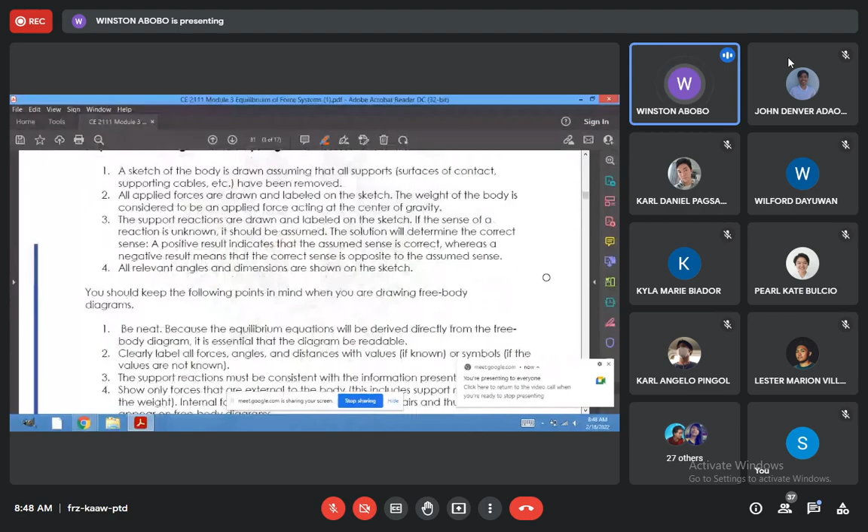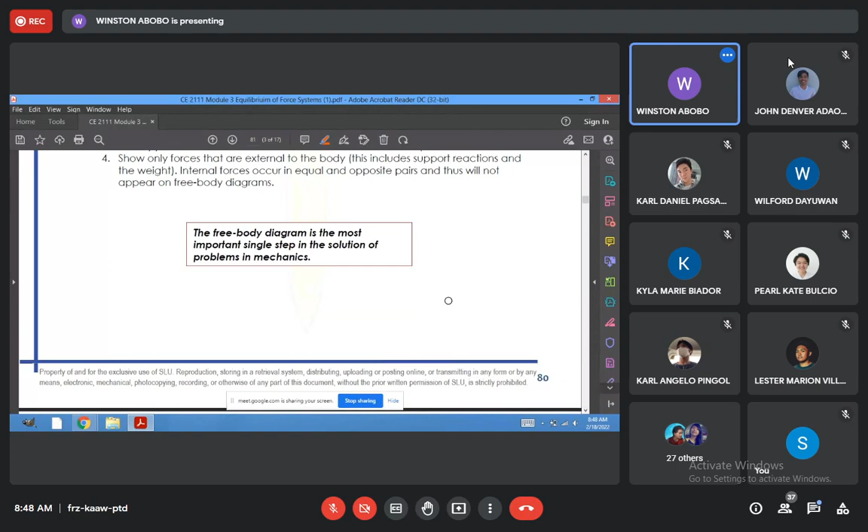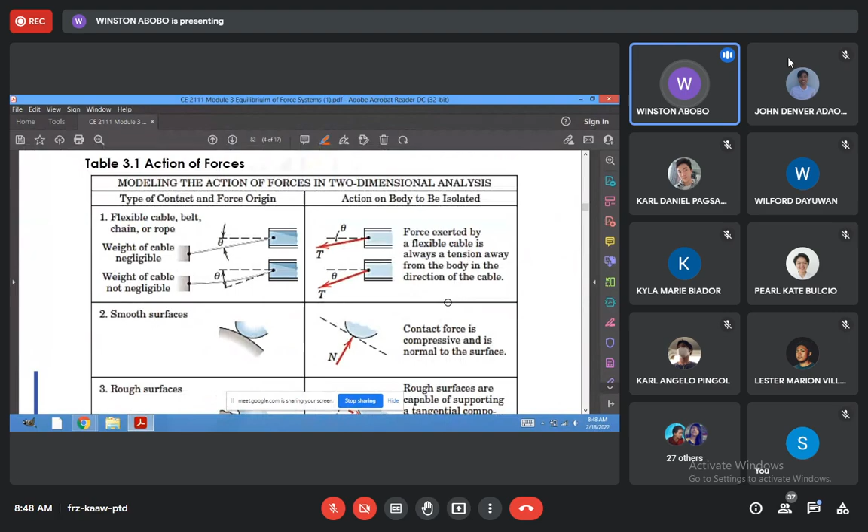The free body diagram is the most important single step in the solution of problems. I will also have to second it, that it is the most important. So therefore, if it is part of the solution, then it should be part of your requirement before you can start.

Then we went on to the different terms that we were talking about: cable, surface. For the sake of our discussion, since we have not yet discussed friction, all the surfaces are assumed to be smooth.

So don't ask whether it is smooth or rough. As I've said, as long as we have not yet discussed the topics on friction, all surfaces are considered to be smooth.

So you have a single reaction that is normal to the plane of contact between the support and the surface. Then you have here the most commonly used, the roller support. The roller is single, normal. The terms used are roller, rocker—this is the rocker. Sometimes roller is used as long as it has wheels. Again, this is a single reaction.

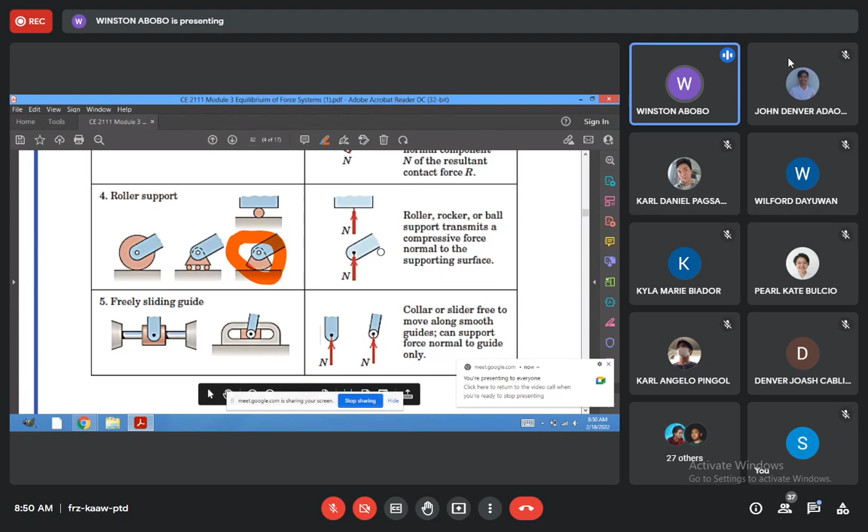So these are the things that we have to see, terms that you would usually meet along the way: rocker, roller. The symbols are there. And of course, as we said, the representation for the reaction is a single force.

And then, of course, sliding is almost the same like a roller. And then you have the pin connection. As I've said, the other word I use is a hinge because of its action, which is also the same like a hinge.

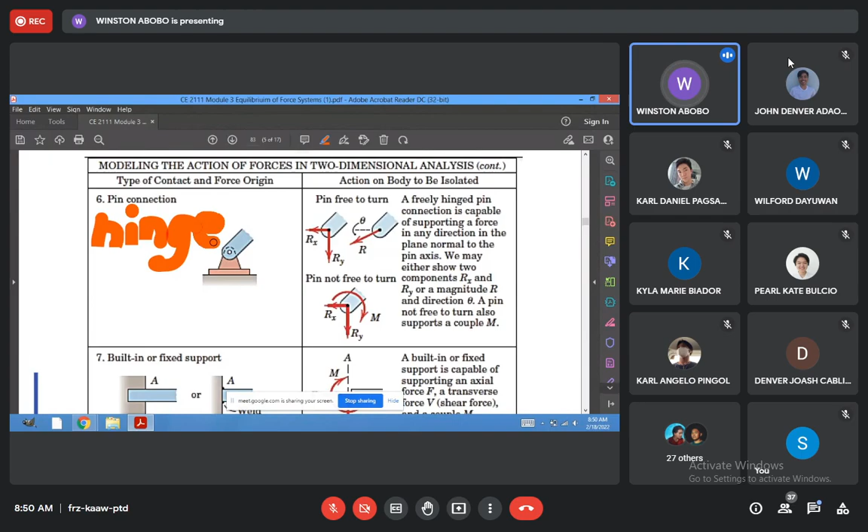So you have two cases. You have a pin free to turn, and this is the assumption that we will have first and foremost here in statics. Pin free to turn means it has no resistance for moment. This is different from steel, where you have moment resisting pins, because your pins are basically somewhat anchored to the component. But take note, what we will be having along the way is pin free to turn.

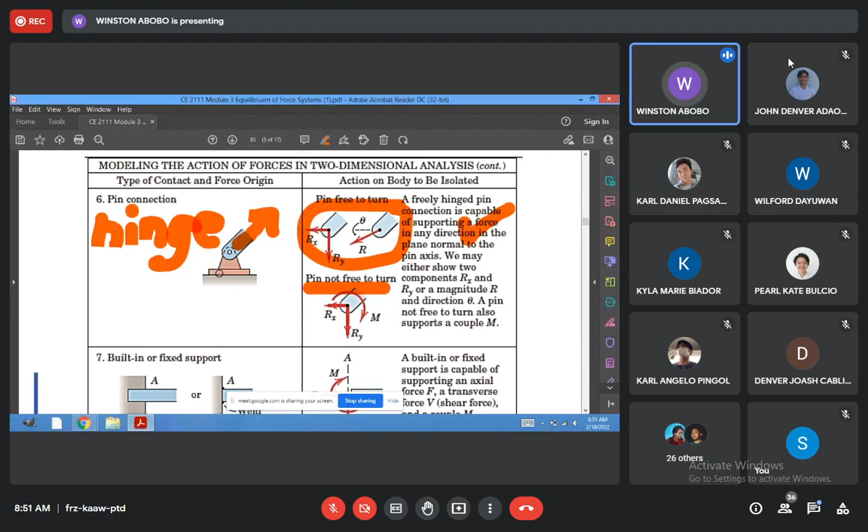So that is now our assumption. And of course, there are two reactions, horizontal and vertical. So these are the things it can only do. If the action on your element is upward, then the direction of your horizontal would be to counteract actor and reactor. This would be the components of your reaction on the hinge, towards the left and downward. That is the correct one.

Because if it is compression, then of course you have to analyze it. Since these are components, horizontal and vertical, you should compute for the total reaction, which is the square root of horizontal squared plus vertical squared, and get the angle theta. So I repeat, for the sake of this discussion onwards until the finals, all your hinges or pin connections are considered to be pin freely rotating.

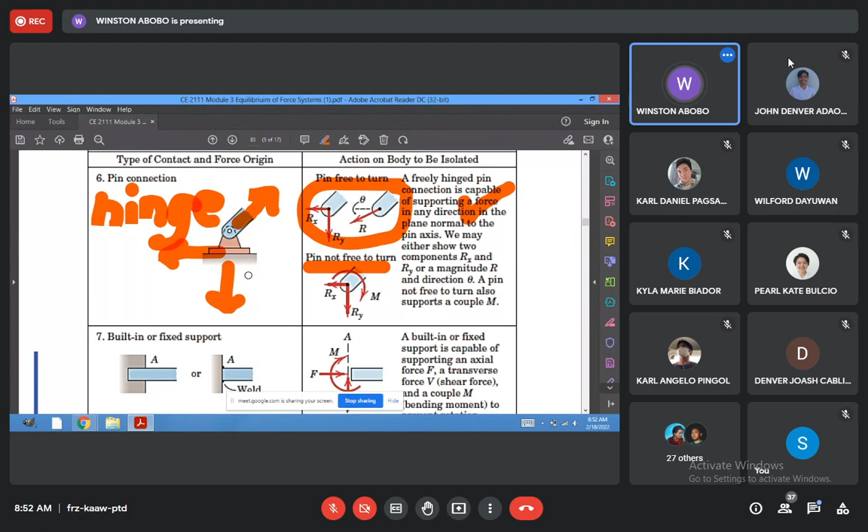The other type which you would be observing, utilized especially in strength of materials and also in this case, is a built-in or fixed support. If it's fixed, you can have the illustration like a structural steel which is bolted or welded to an anchorage on the wall. So this is the same scenario, and you'll notice it has three reactors: vertical, horizontal, and a moment.

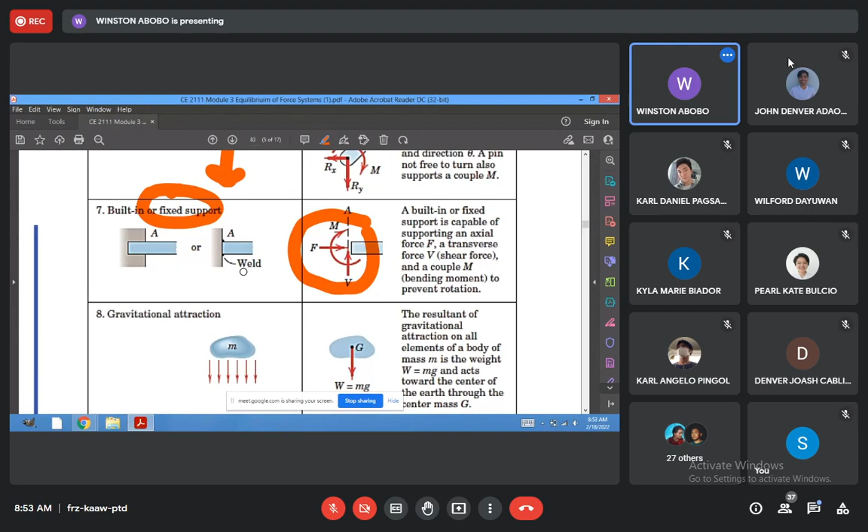So your fixed or built-in support has three: horizontal resistance, vertical resistance, and moment resistance. So if they are reactors, then obviously you can have that.

Determinate—there are terms like the determinate process. What does determinate mean? It means it is statically determinate, meaning you can use your three equations of static equilibrium to solve for the unknown.

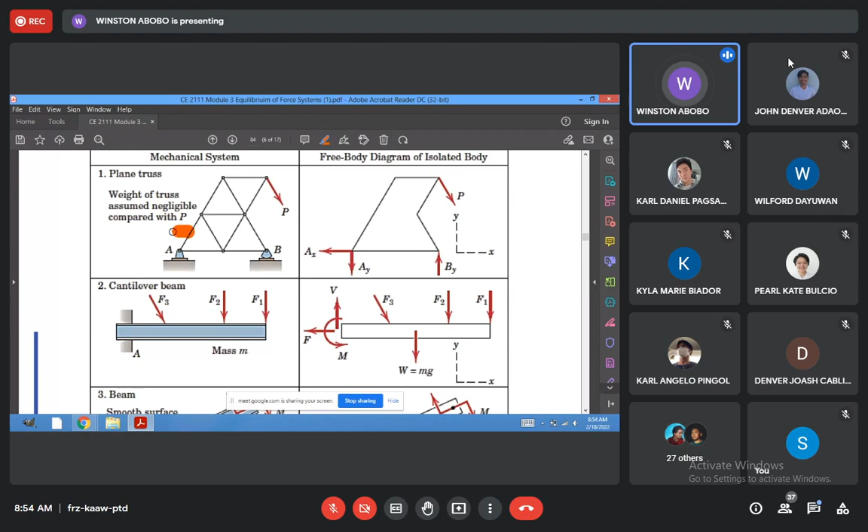In this case, the support conditions are a pin or hinge and a rocker at B. If you count the number of reactions: 2 for the pin or hinge and 1 for the rocker, that's 3 unknowns with 3 working equations, so we can say this is a determinate truss. But aside from that, we will soon learn from analysis of structure that the number of members and joints also plays an important role.

That is, of course, to be able to solve it, we should first determine whether it is determinate, or whether you can solve it using your three equations of static equilibrium. So this is the whole truss, and this is the load.

And of course, as suggested in our discussion, you can start by drawing the structure. Complete it, don't leave it hanging. You complete the whole so that you can see. So the next thing you do is consider the applied load.

Since you have an applied load, that will be P. And then, of course, you now substitute the removed support with the force, which is consistent with its type. So as I've said, this is a hinge or a pin. It has two supports. Take note, the directional arrows are against the applied, supposedly.

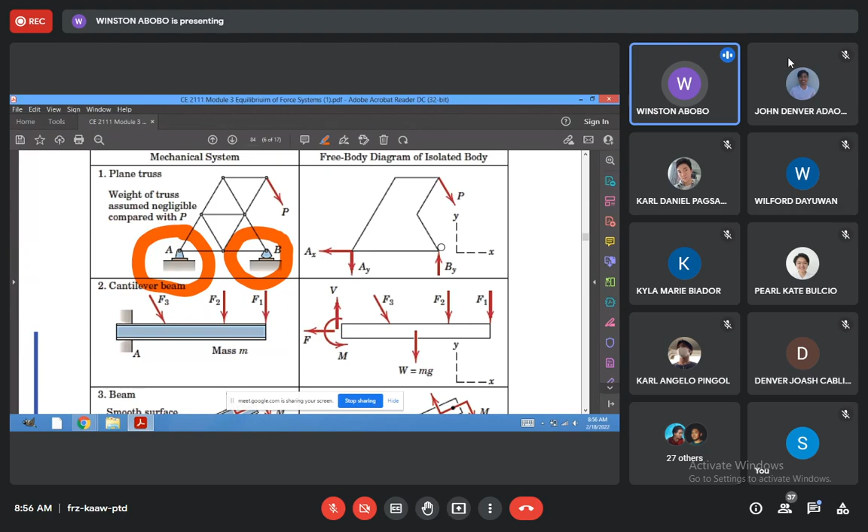For a cantilever beam, the support is fixed or built-in, embedded in the wall. So these are your applied loads, F1, F2, F3. Take note, F1, F2, F3 are your actors, and your reactors are at the support. So who would receive this actor, your reactors? They will dissipate it. That's why your directions should go counter to the intended effect of the loads.

Take note also that if you are given the mass of the structural element, you have to compute for the weight, which is equivalent to mass times acceleration due to gravity. Since it's a rectangle, it is working on the centroid, or simply half of the length. Since it is fixed or built-in for the cantilever beam, cantilever is the term for something hanging, just like your porches outside, those are cantilevered. So it's hanging, and basically all of the supports are on the wall, so transferred, that's why the design is critical.

So you have the vertical, the horizontal, and of course the moment resisting. The direction you have to assume, but when you do the assumption to minimize errors, you do it logically, you analyze. If almost all the forces are causing a clockwise rotation, then to have a summation of moment equivalent to 0, your moment should go counterclockwise to the applied forces. That's the very important point.

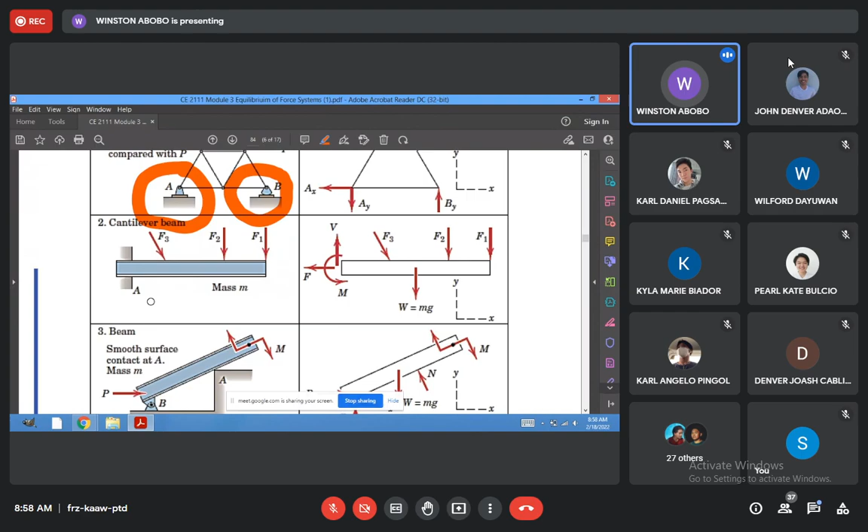So here, look, only this one has a horizontal component. Take note, the horizontal component of F3 is towards the right, so that's why the horizontal component of the cantilever beam is towards the left, opposite. Down, down, down, down. So basically, your upward reaction at the support A is also upward. That's logic, using your thinking.

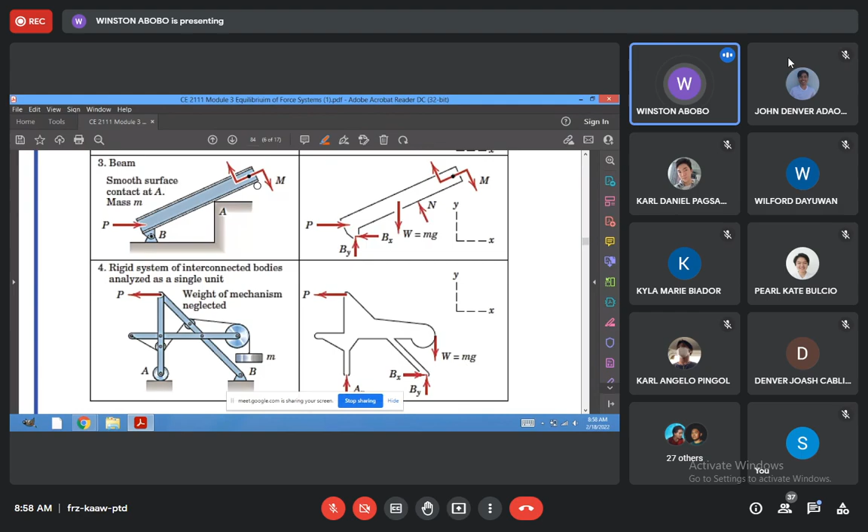In a beam that is connected to a hinge at one point and resting on a wall, part on the wall and part on the floor, if you have that, the applied loads include a couple or moment at that point, and then of course a P, and inclusive to that, the mass of the element. So take note, if I were now to draw the free body diagram, isolate, remove the support. The supports are at B, which is the hinge or pin, and of course the wall at A. That's why, representing that, first draw the loads, P, then the moment, then the weight.

Basically it is directed downward, that is the weight. For the support, take note, pin, there are two components, Bx and By. And for A, since it is just merely resting, this is the point of contact, you simply have that as the normal N. The other one, since it just rests, nothing else, it's just like a rocker or roller resting there, but the force is normal to the plane of support.

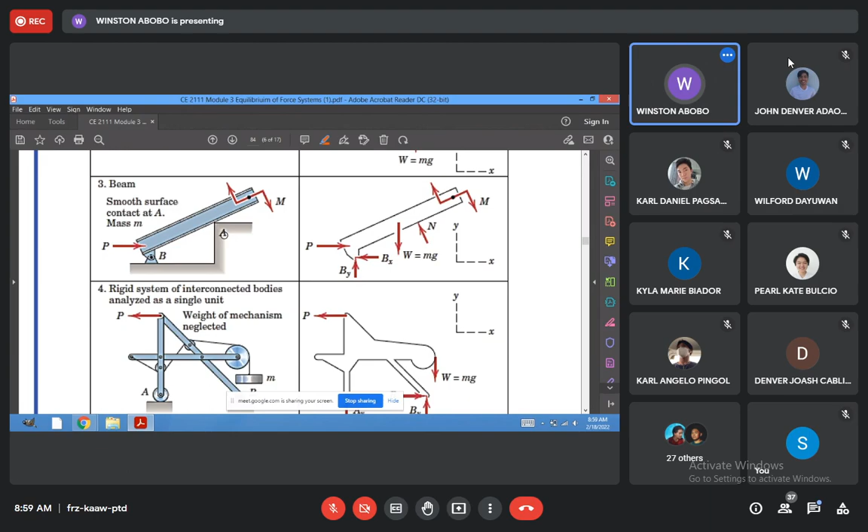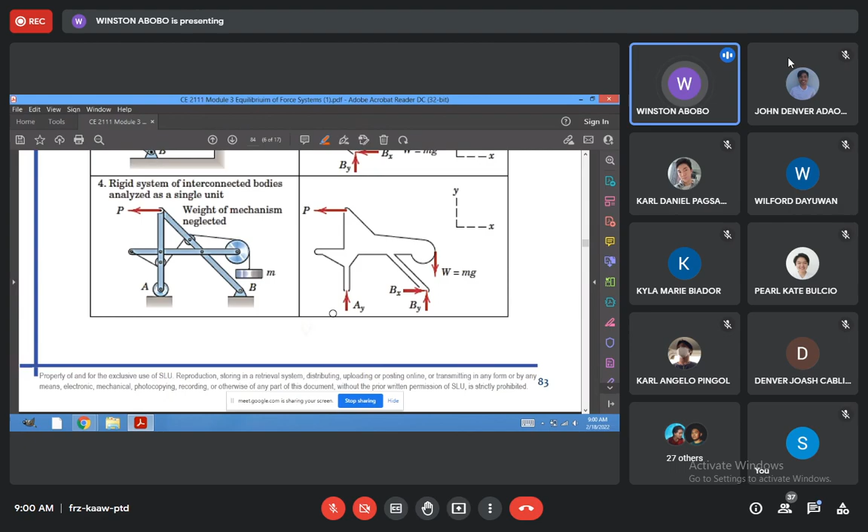In the other one, you have a rigid system of interconnected bodies. You have a pulley carrying a weight and a cable carrying the weight and transferring it to these different points. If you analyze that, it seems complicated, but if you are merely to solve for the reactions, you have a roller and a hinge. You can see the roller is represented with Ay, and Bx and By for the support at that point. Then you have to take note the applied loads P and of course the weight. So it's very important to determine what it will do. That is the free body diagram.

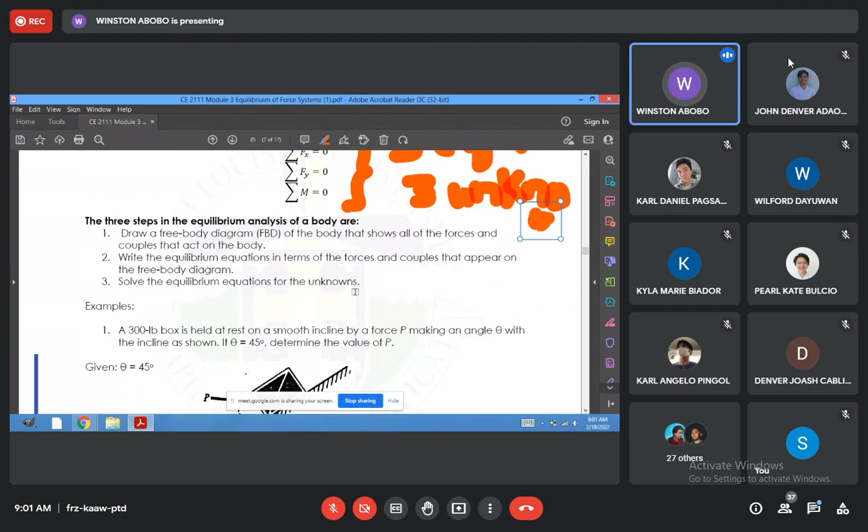Okay? So for now, we would be resting on three equations: summation of forces on the x equivalent to 0, summation of forces on the y equivalent to 0, summation of moments at any point equivalent to 0. So the three steps on equilibrium analysis. First and foremost, draw the free body diagram. So this is already integral.

I have to emphasize, re-emphasize, that you have to have a free body diagram before you can start this. This is also what I observe, I know it was rushed, copied, no diagram. Because the big question is, where is R1 or the resultant of this one? It's not emphasized in the drawing. That's why you have to be very careful on how you present it. It must be consistent.

Just wait for who's who. Although we know, as I said, copying isn't so bad. Just don't pass without understanding anything. Of course, it's really difficult to assume, it hurts sometimes. If that's your child, accused of cheating when they just copied. I don't know. But of course, it has some moral issues with that. It's up to you. If you make it a life principle that you will not cheat and you accept that cheating is bad, then okay, that's nice. That's something that will help you in your later life.

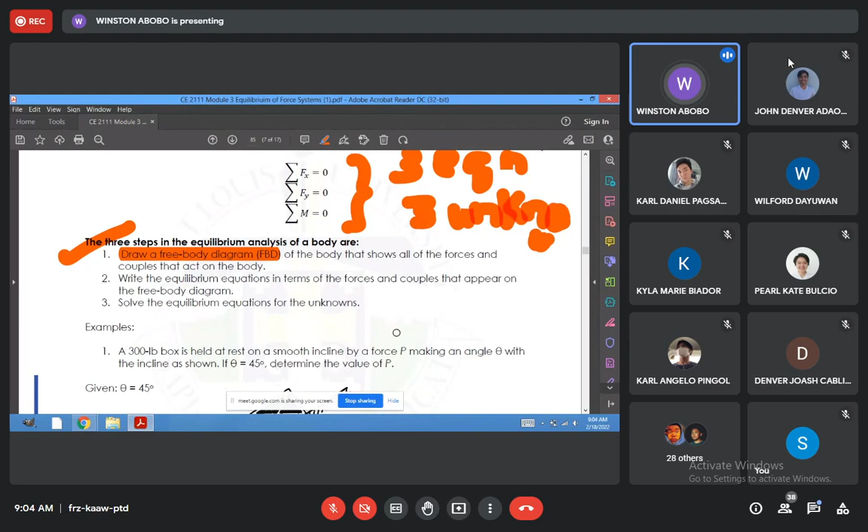Then, just like in this problem, you have an example, a box again resting on an incline. And then you have a force P, which is the unknown, with an angle of 45 degrees. And then we are to analyze this. It also has the weight given, 300 lbs. We have a 300-pound box resting on an incline, and you are to determine the value of P. Again, the term is smooth incline because we are still in the introductory portion. But later on, if it's changed to rough, my equations will be different.

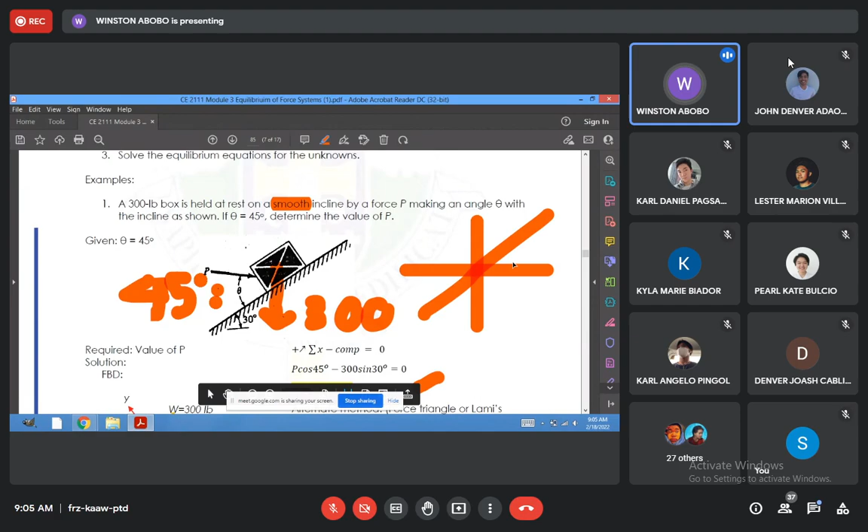So, first things first, draw your free body diagram. This is the free body diagram. You will notice that the forces are coplanar and concurrent. So you can have your usual X and Y axis. But what we will use instead of the normal X and Y is the incline. You have seen the benefit of using the incline: many terms get eliminated. That is the strategy here. So there will be two approaches, using the polygon and the algebraic.

Using the incline, the weight can be transferred here, to be consistent, and force P is there. Transfer it so you can see the bigger picture. If that is 45 degrees, this is 45 degrees. If that is 30 degrees, that is 30 degrees. This is the weight, and that is P. Why did we rotate it? Because you eliminate many terms and only deal with P and W. This is the normal, the contact force N; you can draw it upward so you won't get confused. We eliminate N and outright solve for P.

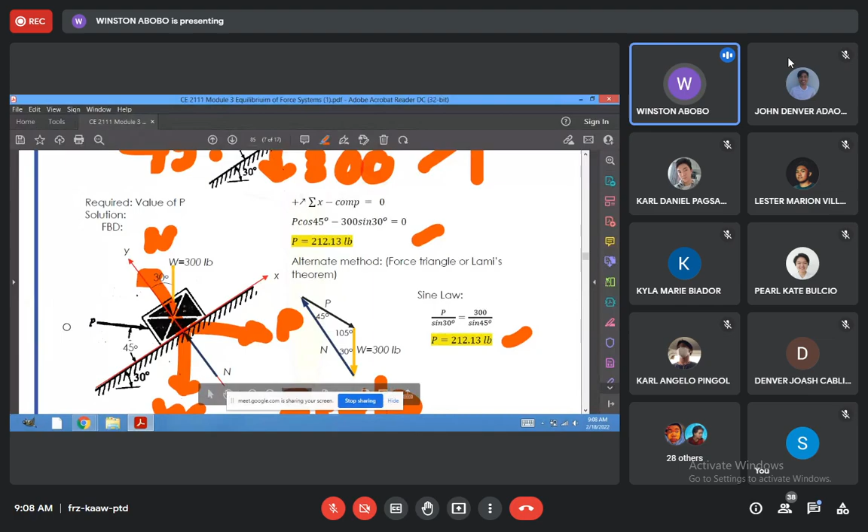The alternative method, as I've said, is drawing your closed polygon. So the very first, what I can tell you is, of course, to draw it in a way na you start with either a horizontal or vertical force. Kasi madaling i-drawing. So we started with the weight, which is vertical. Again, if you want, you should have a scale para may graphical ka, you can check your answer kung tama nga. So here, you plot now, downward, 300 pounds.

And then, of course, the normal, we don't know, but we know that it is 30 degrees with the vertical. So you can have that, 30 degrees, plot it out. The magnitude, we do not know, kaya lapis lang yan. And then the value of P, of course, we don't know. You can plot yung 45 degrees. The 45 degrees is with the horizontal. So, yan, 45 and 45, that's why you have that 45 degrees. Dito, parallel with the incline, the 45 degrees.

So, getting the interior angle, the total interior angle of a triangle is 180. 180 minus 30 minus 45, 105 degrees. And using sine law, you can now solve for P. P divided by sine of the opposite angle, 30 degrees, is equivalent to the given 300 over sine of 45. So you have that relationship. And checking it out with the analysis made a while ago, you can have this as equivalent to each other. So that's an option. Of course, you can do that. Skip na lang natin dito.

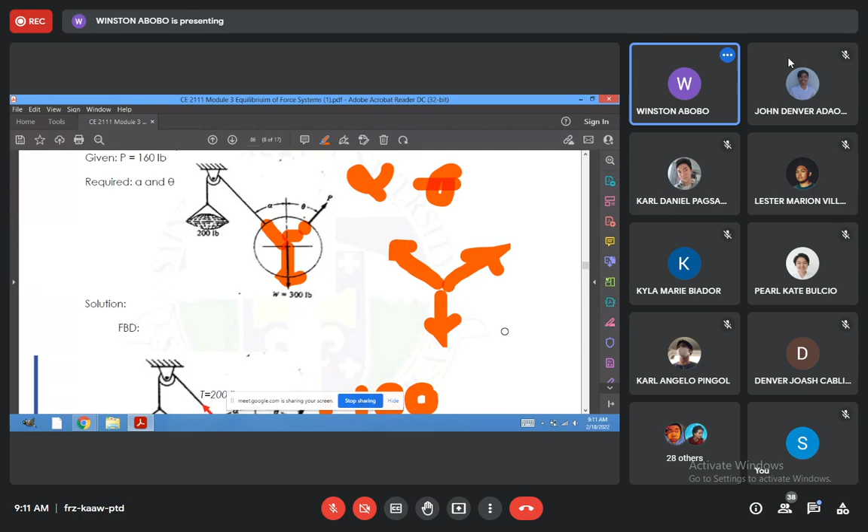But unfortunately, we have two unknowns and you have two equations. For this type of problem, hindi ka naman magmo-moment dyan. Dalawa lang ang equations that you would be using. Summation of forces on the x equivalent to 0. Summation of forces on the y equivalent to 0. Two equations and two unknowns, alpha and theta. So, in the cable, it's equivalent to how much it is carrying, di ba? So, it is transferred. That's why, as I've said, you can start doing it there.

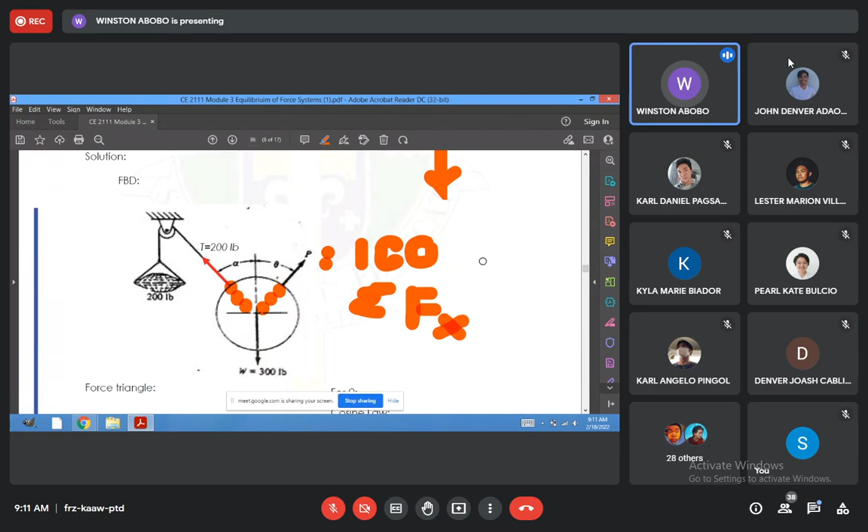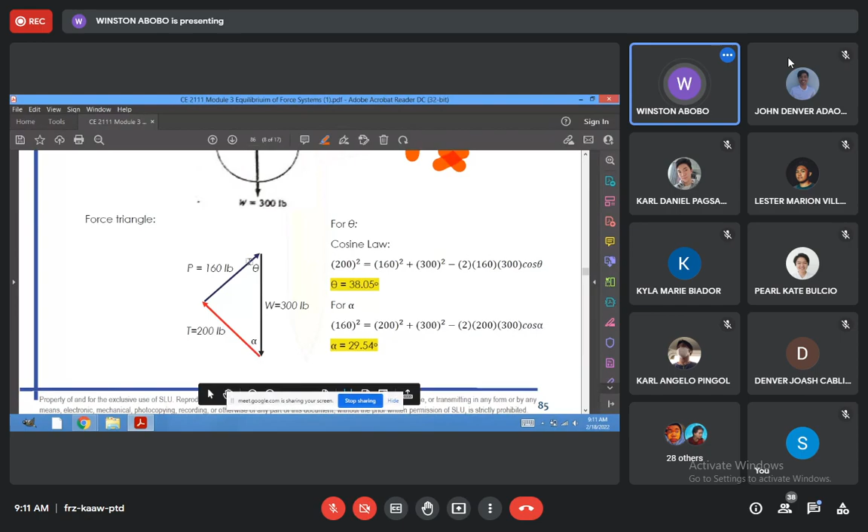Then, from there on, you can use our force polygon method, which is the best option for now kasi hindi natin alam yung theta at alpha. But of course, assume ito. Ginawang assumption lang yun. Okay? So again, you can use cosine law. So cosine law, you can utilize it here. Okay? In the next problems that we have.

We will go now to planar equilibrium. So when you say planar equilibrium, x and y muna. So for planar equilibrium, you have three equations that you can utilize, as I've said. Three equations, then you have three unknowns. And sometimes you would meet the term statically determinate. So yung term na statically determinate, it means to say that using your three equations, you can solve the unknowns. Kasi kung indeterminate, hindi mo ma-solve. It needs another fourth equation.

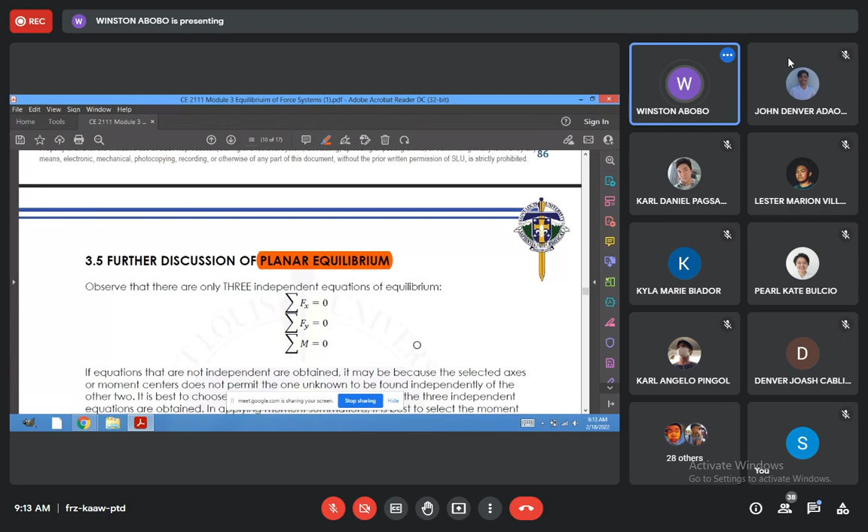So in this case, when you say statically determinate, these are structures that you can analyze simply utilizing your three equations of equilibrium. So there is no problem with this because statics merely deals with statically determinate. So if we say statically determinate frame, these are frames that you can analyze utilizing your three equations of statics or equilibrium.

So just to start off, this is a problem that is very nice to work on because it gives us maraming option on how to solve this, as I've said. You can, of course, start by doing your moment. But the strategy here is, in this problem, you are to determine P, F, and T. Take note, three unknowns. I have three working equations. So this is a statically determinate structure. So these are the applied loads, the P, 600, 200.

But I have three unknowns: P, F, and T. So what you can do here, this is a strategy. If we start with summation of forces horizontal, it has a horizontal unknown, so three unknowns. Summation of forces vertical, it has a vertical unknown, ang hirap, tatagal pa tayo. There will be three equations in a system, eliminating either by substitution or elimination. So the best option now is the moment, and this is how to do it.

So if this is the action line of P, what you can do is project it. Line of action. And then I want to eliminate P and T by having a common point. Yung topic ng anak ko is what we call common factor, least common denominator, least common factor. So what is the logic why I am doing that?

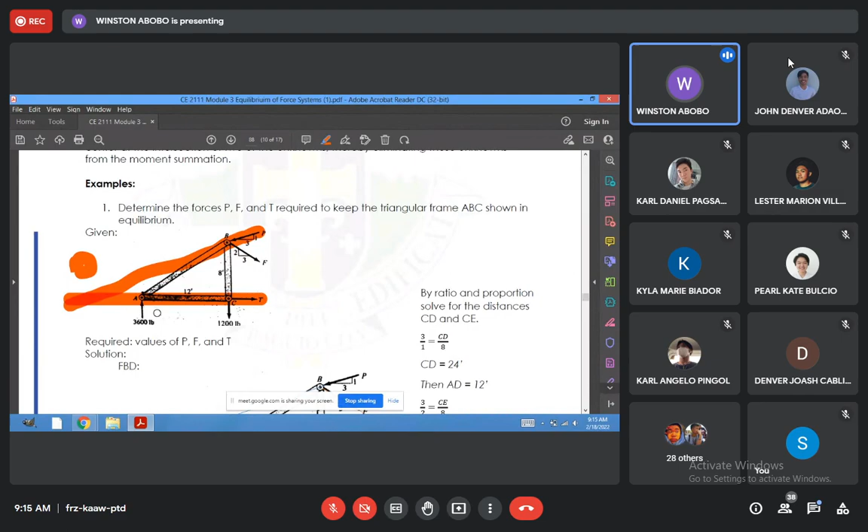Because if there is a common point, in this case D, you will notice that at common point D, I eliminate P by virtue of zero lever arm. If a force passes through that point, its moment becomes zero. And force T, the same, it passes through that point. So at a certain point in space D, I will be eliminating P and T by virtue of zero lever arm, and I have only one unknown. Of course, these are applied loads, so there is no problem with that. It's given. That is the strategy now.

So what was presented here is that there is now that common point. If I were now to take a moment, the distances are very important. So how did we get the distances? By using the slope relationship, 1:3. But you are given 8. So 8 times 3. If 8 is 1, then its horizontal component is 24. So the distance of D from C is 24.

So this is the line of action of force P, and this is the line of action of T. We remove P and T. So this is now our point of rotation. If you assume clockwise as positive, it's just an assumption, not a convention. If you want counterclockwise, then 3600 becomes positive because it's counterclockwise. But we'll work with the module, clockwise as positive.

So the first force, 1,200, multiply that by 24. Minus 3,600, why minus? Counterclockwise. Times 12: 24 minus 12, so this is also 12. And then the problem of F. We use the line of action again and project it to a point. You could also consider it here, but at this point it has both horizontal and vertical components. Here there are still two, but F of x passes through point D, so only the vertical component remains, directed downward.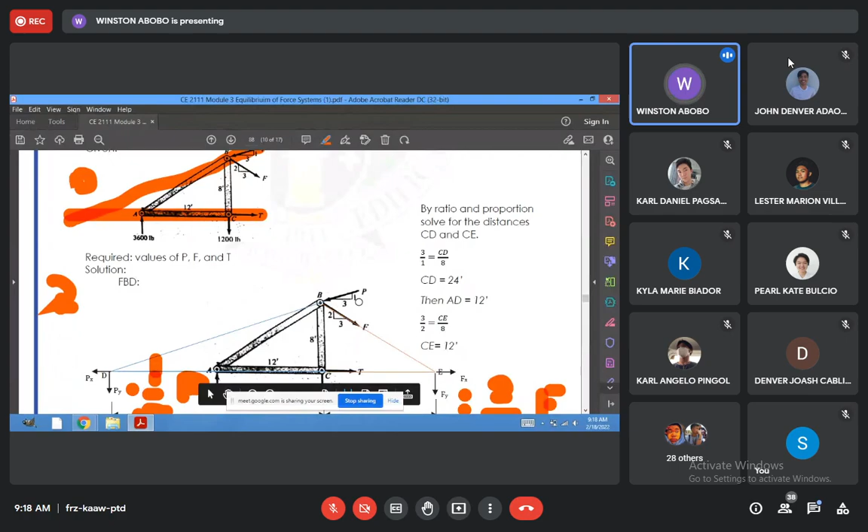Actually, we should have started with B. If you start with B, it eliminates P and F already. So our only problem is T. Summation of moments at B, clockwise again as positive, to be consistent. Eliminate, eliminate, only T remains. It's horizontal, so no problem with the lever arm.

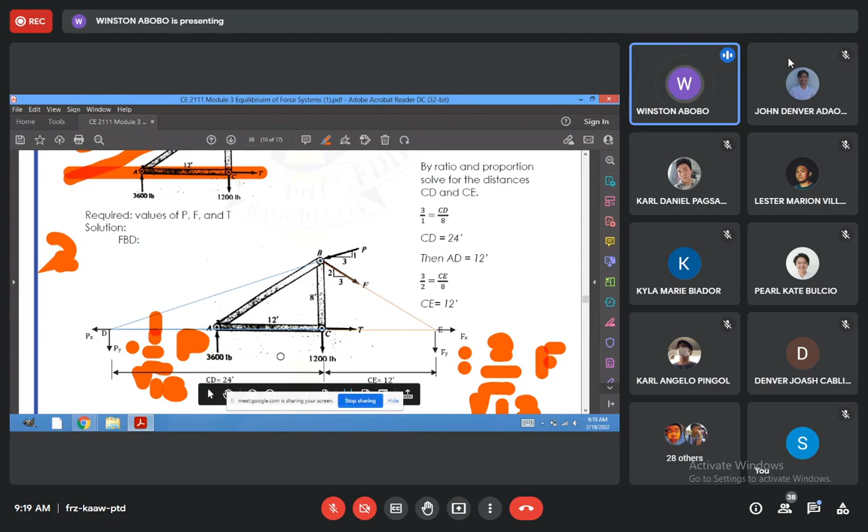So summation of moments at B: T times 8, minus because counterclockwise. This one passes through the point, so no lever arm. Plus 3,600 times 12 because it is clockwise with respect to point B. That's the equation for summation of moments at B. Eventually you can solve for T. So T, F, then P. Take note of P, here it is.

So, you have to choose a point, yung point E. Point E, it will eliminate the value of F and T, leaving one unknown. And then take note, the point of application of the force will be at point D. Action line naman niya yan, di ba? So, you can place it anywhere. So, eventually, what I will use would be the component.

Take note again that the horizontal component of P passes through D and E, tama? So, problema lang natin, you only have your Py, and of course, basing it on the slope, 1 over the square root of 10 P. That is the vertical component of P. So, if you take a moment about E, you eliminate F and T, and you can solve for P.

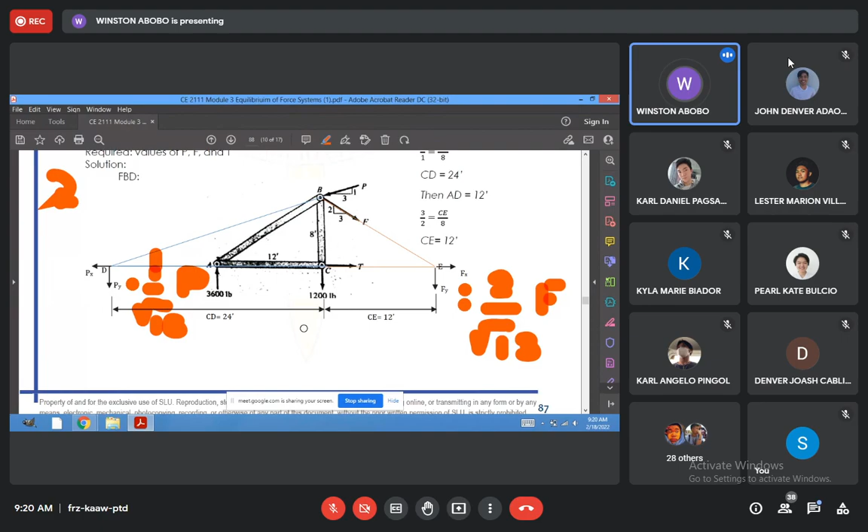So, if clockwise is positive, clockwise lang yung 3,600: 3,600 times 24, minus 1,200 times 12, and then minus counterclockwise, Py, 1 over the square root of 10 P, multiplied by 36, 24 plus 12. So that is what you find in this equation here at the bottom, summation of moment. Then eventually, one unknown, you can solve.

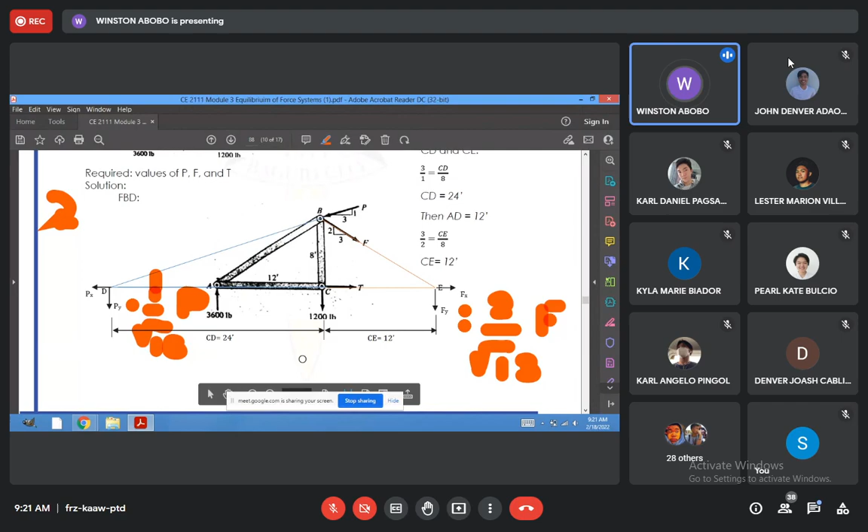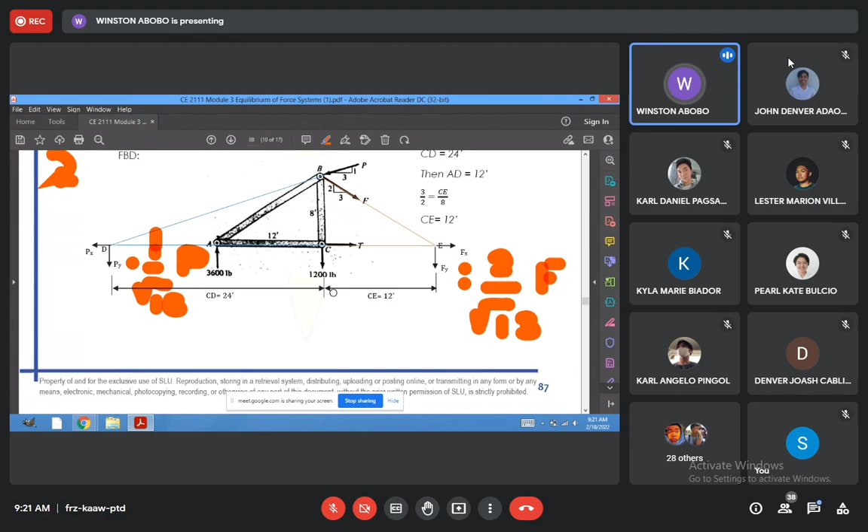For your checking, this is the good part. You can do the checking. Since you have already assumed that this is in equilibrium, it is statically determinate, you can start off by checking. Take summation of forces on X, using your solved values for P, F, and T, if it will be equivalent to 0. Then take again summation of forces on the Y, is it equivalent to 0? So these are the equations that you can utilize to determine whether you have the correct solutions or not. So just to correct it.

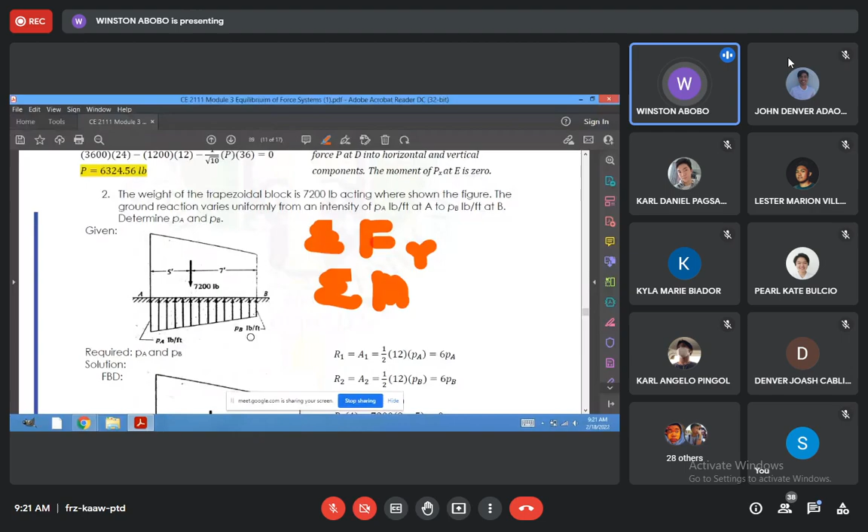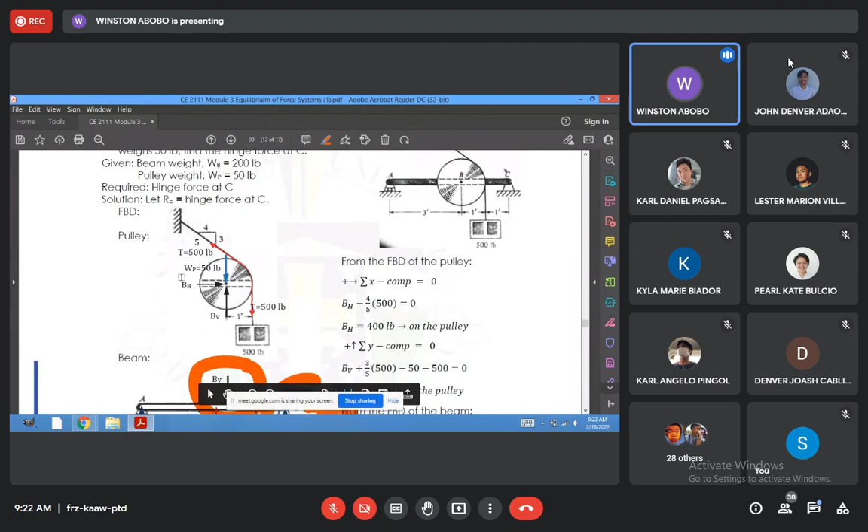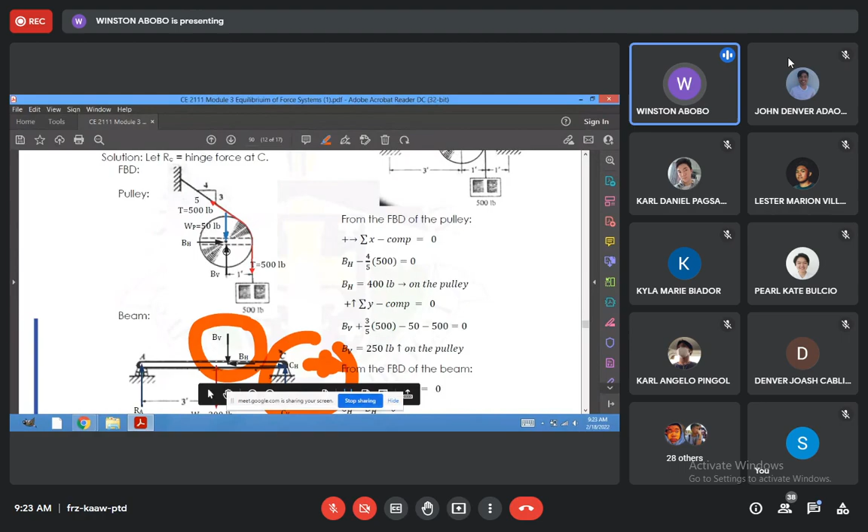After you have determined that, utilizing the free body diagram of the pulley, you will transfer it. Now, this is the part. Sir, bakit nagkaiba? Sabi nga sa Newton's law, for every action, there is a reaction oppositely directed but equal in magnitude. That's why take note how it is applied from the pulley to the beam. The vertical is upward sa pulley as a reaction. But when it comes now to your beam, it becomes a load, and the direction has changed from upward to downward. For every action, there is a reaction oppositely directed but equal in magnitude.

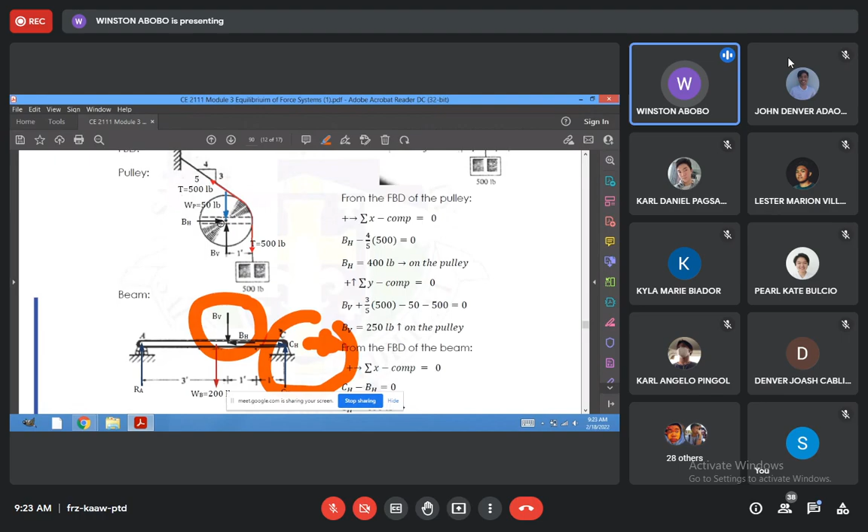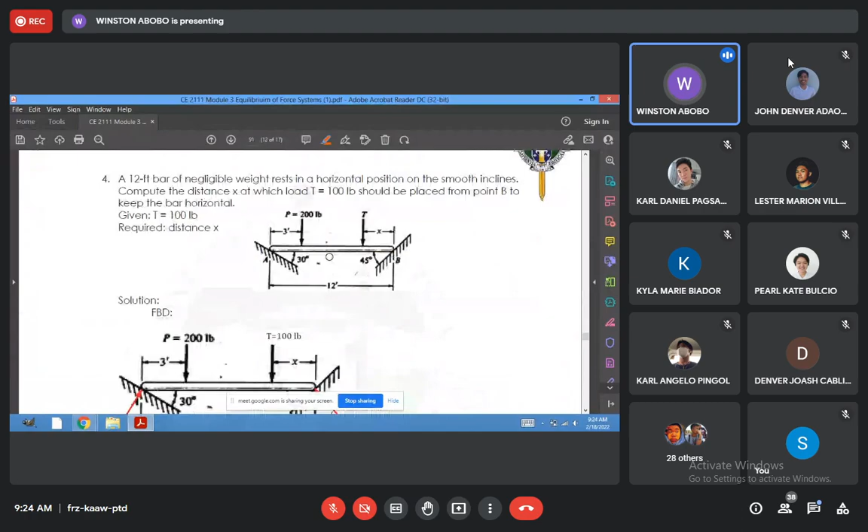For the horizontal component, using the free body diagram of the pulley, it is towards the right. But when it is transferred to the beam, it becomes towards the left. Okay. So, this is now the challenge for you to try to work on. Ito naman yung pin problem. Ayan, isa rin. Gustong-gusto ko rin yan. Incline. So, anyway, for the class problem, again, you look at it, support, incline. So we have here, normal yan.

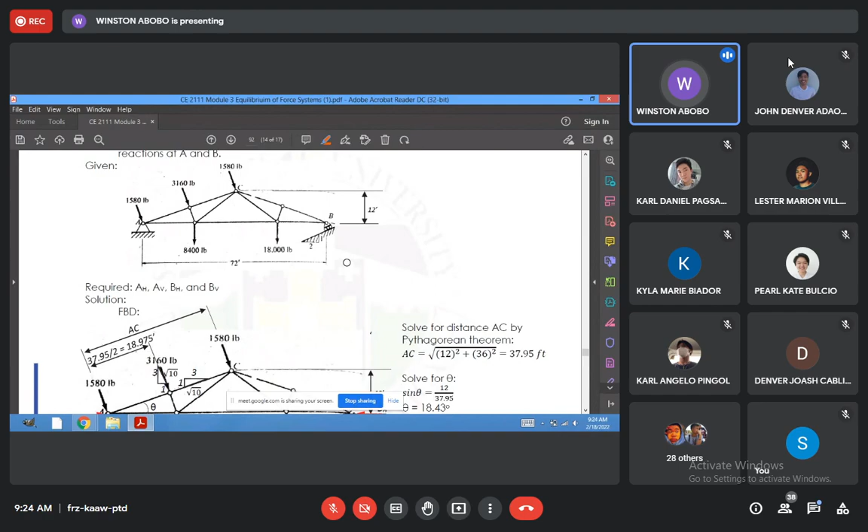Okay? So since it's almost time, 9:24 na. Do you have any questions so far? Children of the gods? Do we have any question? Can I stop presenting? Miss Bulcio? Ano sabi? Sir? Do you have any question? Wala naman. Sigurado. Okay? So, I will see you on 23? 23 ba? Nilagay ko? Yes, sir. 23 is the Wednesday.

So, you have to be there at 8:30 because it's already exam. So, 3 hours. Spend that time there para hindi kayo mamoblema. So, we will utilize the full 3 hours, unfortunately. So, kung meron kang next subject, I think, kung 8:30, 11:30 yan na yung next schedule. So, if you have 11:30 to 2:30 schedule, 3 hours din yung window. Okay?